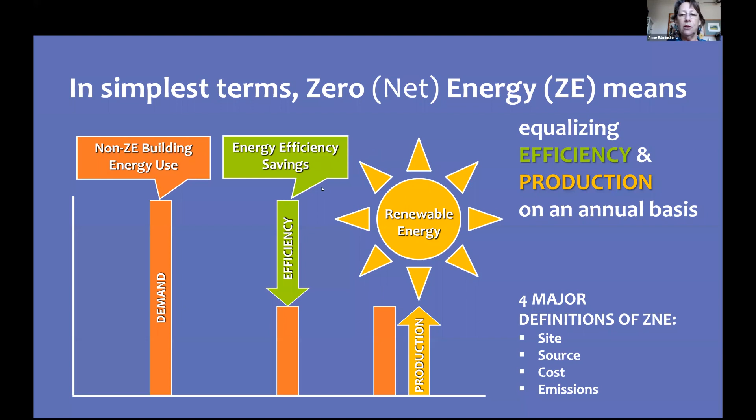Next slide. Okay, so what we're finding initially is there are all types of zero energy homes. And I think in the early days of this movement, there was a general perception that this was really sort of a niche boutique part of the market. That's really not the case. Certainly we do have our luxury examples, but we've also got affordable homes, both single and multifamily, spec developments, and production. So all sectors of the market are represented with zero energy homes.

Next slide. We also find them in pretty much all North American climates, and I've just shown one example in one of our more extreme climates as an illustration. Let's move on.

So all of these homes or projects have certain things in common. They are paying close attention to form and orientation. A lot of emphasis on the enclosure performance, so roof, walls, floor, foundation, windows, doors, and then they're all looking at ways of producing comfort, heating, cooling, and mechanical ventilation in super efficient ways, and then best-in-class electric devices, so lighting, appliances, and electronics. Of course, not all those are supplied by the builder or specified by the designer, but those are the ingredients that go into a zero-energy home.

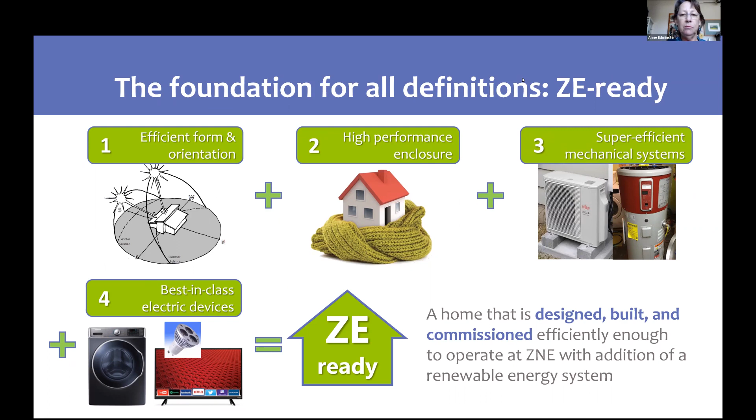So that's pretty much what it takes. Add those ingredients, sort of like, here's your baking, add water, you get zero net energy.

I think one part of the conversation that really is lacking frequently is the fact that a zero energy home is a home with something else. It adds a utility or a piece of utility functionality. So when we talk about a zero energy home, I think we're missing an opportunity to point out that there's quite a bit more to it.

We're, in effect, transferring some of the money that has traditionally gone to a utility into the home itself, paying less to the utility, and the net effect is that we have more control over the energy systems and bills in a zero energy home by virtue of including that partial utility functionality.

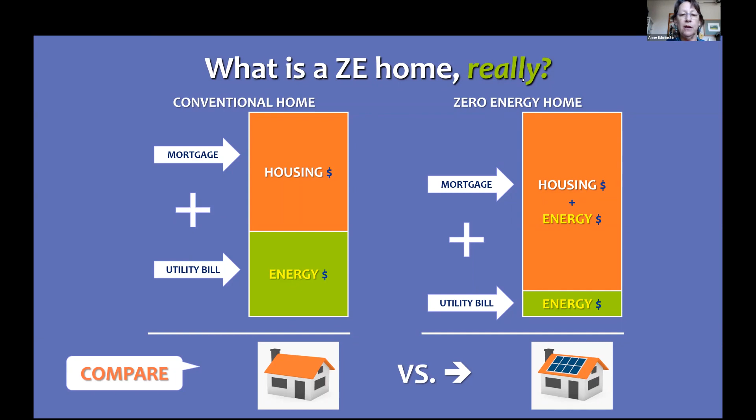We're reducing noise through better quality enclosure, less wait time for hot water because that's another system that gets a bit more attention. And of course, by really controlling the energy performance of the home and requiring less from the utility, it means we are less vulnerable to changes in cost from utility supplied energy over time.

Meanwhile, we result in greater levels of comfort, higher quality indoor air, increased equipment reliability, and of course, energy self-sufficiency.

I like that the title of your May webinar, Tim, really looked more at energy self-sufficiency. So while a zero energy home is connected to the grid, we have more of those capabilities within control. Next slide.

So here's the way I really encourage people to think and talk about a zero energy home. It's something that has a very significant added value as compared to the garden variety home that isn't zero energy. It's not the same product. It's not the same value. It's an increased value. And interestingly enough, may actually carry the same price, however, but need not.

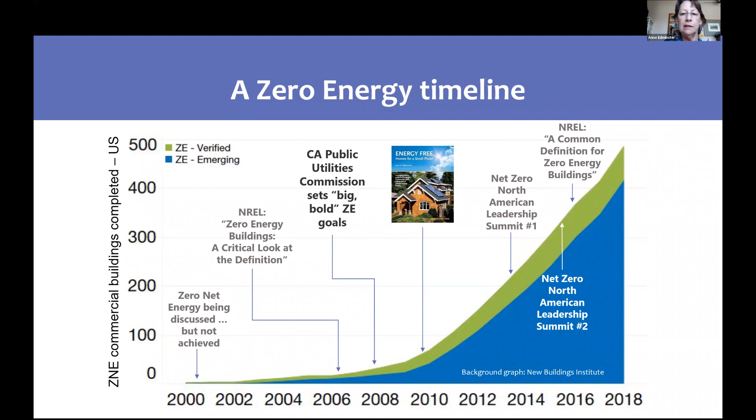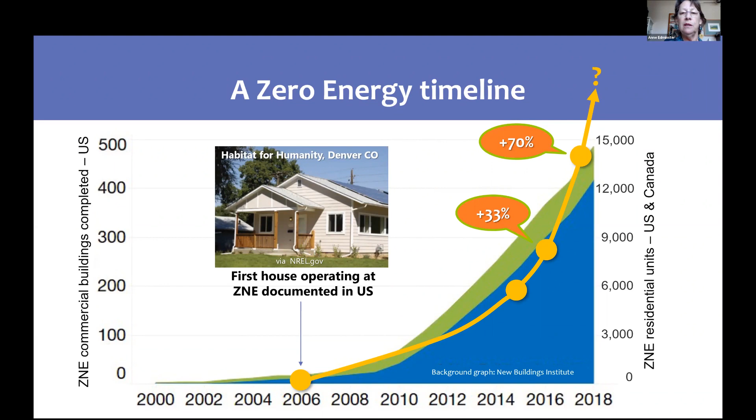Let's move on. Obviously, that's still a really small number of housing units compared with all the homes we have in the US, but it's healthy growth, and we hope to see it go exponential and really transform the industry soon.

Meanwhile, among the things the inventory has revealed are these different waves. The first wave of early adopters was dominated by single-family, luxury, bespoke homes. The second wave, interestingly and somewhat surprisingly to many, is really dominated by affordable and multifamily projects. In both 2016 and 2017 inventories, about 50% or more were multifamily, so this is by no means a boutique movement.

On the next slide, you'll see our third wave, which hasn't completely hit yet but is starting to be felt in the stats: the emergence of spec and production builders into the zero energy movement. Once that wave hits in full force, it's really going to represent a lot of building activity, so we're quite excited to see that, along with continuing growth in the multifamily sector.

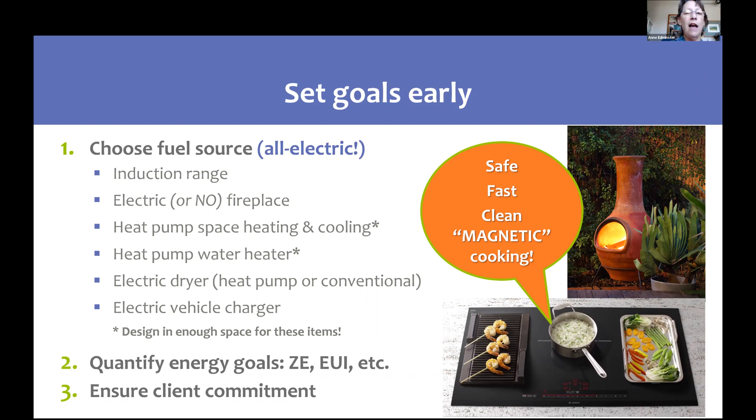And then finally, but by no means least, client commitment is critical to this. Anytime you're targeting performance goals that are outside the norm, the client absolutely has to be behind it. The financial support has to be there to pursue these goals, because while it need not cost extra, it does require a steadfast dedication to pursuing the goals in order to get every member of the team to conform to those.

I've actually done a poll with thousands of people in different groups about which of these attributes they think might be expendable on the project team. The only one that all of these thousands of people are willing to give up on occasionally is experience, and never experience of the team as a whole. However, an inexperienced team member who exhibits all of the other characteristics can still be a fabulous contributor, provided there's a body of experience in the team as a whole.

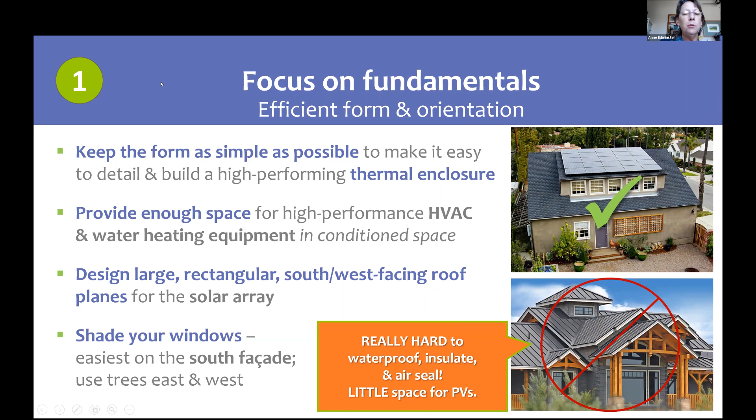So form and orientation, some of the things that maybe aren't thought about in a more routine design that doesn't have these high performance energy goals. The ability to have enough space for all the stuff that's involved, so your roof space for some of the heating, ventilating, air conditioning, and water heating equipment that might normally not go into conditioned space and really should or must go into conditioned space. And there are ancillary benefits of a somewhat simpler enclosure, meaning less time, cost, and risk associated with waterproofing, insulation, air sealing, those forms.

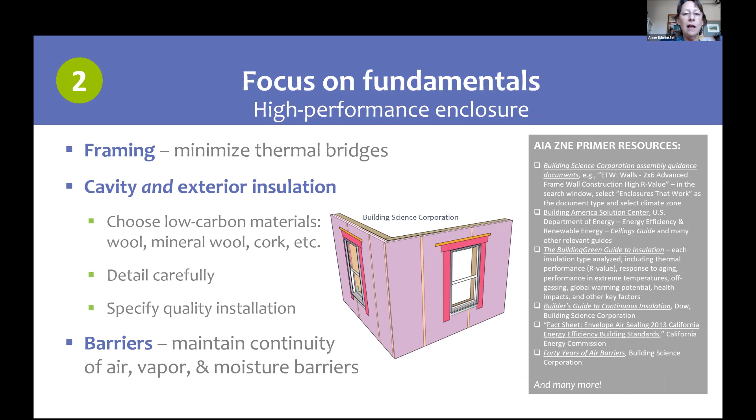That resource, while it is written for California architects, is by no means exclusive to Californians nor to architects. There are a few things that are specific to California's circumstance, but I think it's a very useful guide for many.

So a little bit more about enclosures, air leakage control, which I've already mentioned, but honestly I don't know if it's possible to harp on this issue enough. You all are in a much colder climate than I am, colder and warmer as a matter of fact, and more humid, so a lot more what many folks would call real weather than we have in coastal California. So it may not be quite as necessary to emphasize this, but we find, all the teams I work on, that getting this aspect of the enclosure done in a satisfactory way is the thing that causes the most aggravation, brain damage, and arguably unnecessary expense if it were approached in a more comprehensive way.

And that comprehensive way would be providing the details in air sealing. It's embedded in the American Institute of Architects Zero Energy Primer that I referred to here. There's a link to that primer at the end of this slide deck.

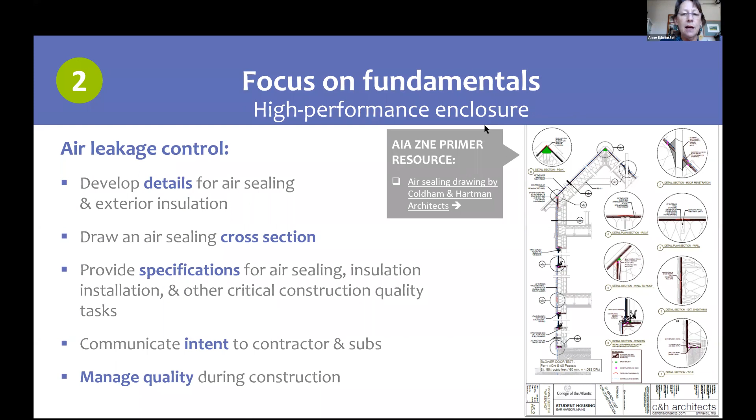Okay, so a little bit more about enclosure. Enclosure, honestly, the enclosure is the bedrock of a high performance home, so it deserves all the attention you can give it.

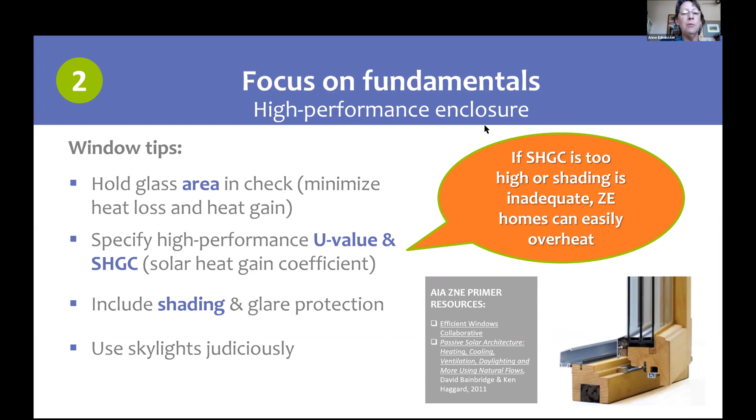Again, some maybe not entirely obvious issues about windows. Views are a big issue for custom homes, and those views, in my opinion, often lead to a little too much glass area. One of my favorite quips to project teams is, I don't think your knees really enjoy the view—do we have to have glass down to floor level? So everything we can do to be reasonable and judicious in providing glass area that's appropriate for the functionality, doesn't compromise performance. And then, of course, the more obvious aspects of the specification map.

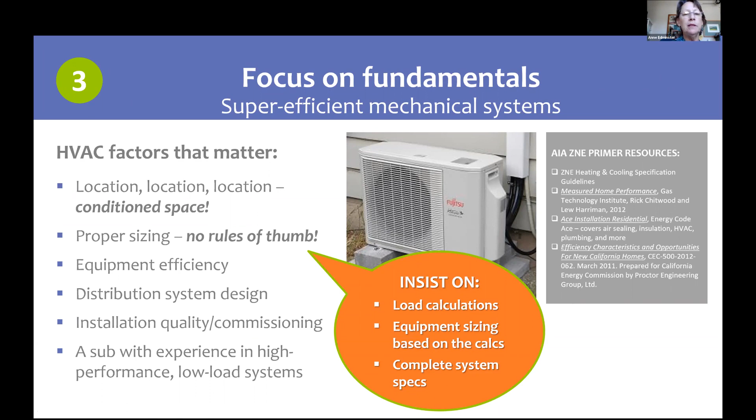Now, moving on to the third aspect of the fundamentals, efficient mechanical system. I want to point out that equipment efficiency is really the only factor in HVAC performance that normally gets any attention. While it is certainly important, all of these other factors can be equally, if not more, influential in the overall performance of an HVAC system design.

So let's go ahead and roll forward, since all this will be available to you to read the gory details. Similarly, there are some factors in mechanical systems, conditioned space, the equipment, and as designers, locating water heaters and taps as close together as possible, a mental shift, as opposed to scattering them all over a plan.

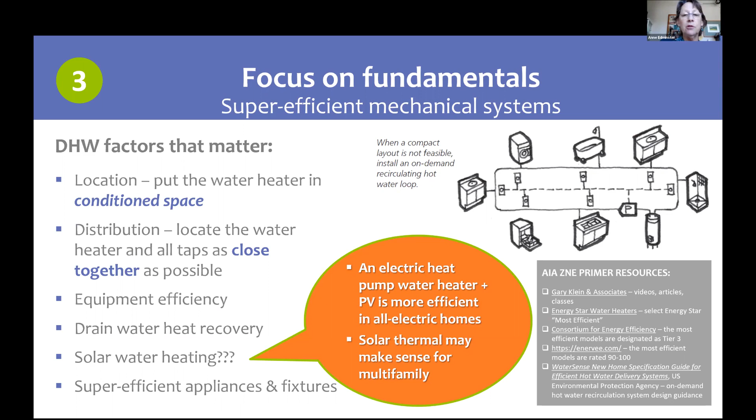Again, equipment efficiency is important, but not necessarily the be-all end-all, because we have many other factors that go into the overall equation. Let's go forward.

So factor number 4, best in class electric devices. If we were doing this live, we would have another quiz to find out what people think best in class means. The usual answer, by the way, is Energy Star. And yet Energy Star, in fact, has become almost a de facto for performance rather than representing top tier, so much so that the EPA has introduced its own top tier, referred to as Energy Star Most Efficient.

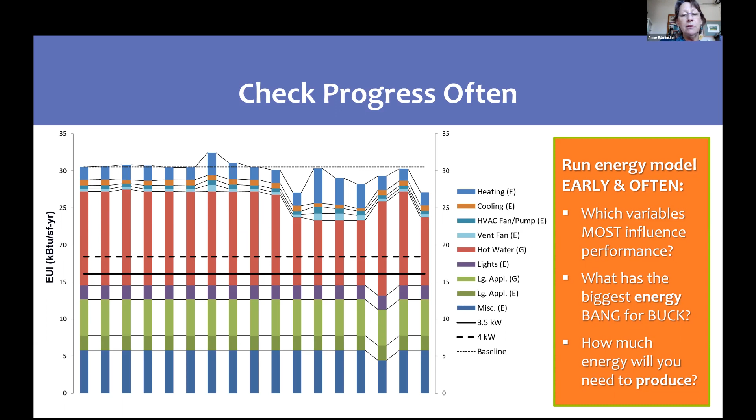So this graph here illustrates one project that I worked on where we wanted to really understand the influence of the different variables. Initially we vary them one at a time to see—we've got some significant and less significant influences here. Once we understand where the big influences are, we can focus our efforts more on fine-tuning performance and putting together packages of features and performance specifications, and then also looking at how much we're paying for those features.

Another aspect of checking progress is balancing energy production capacity with energy consumption. So the energy model will give you information about the energy consumption, estimated, of course—we haven't introduced the human element yet—and then getting information on potential solar production. There are a variety of resources to help with that. Online, we have on the National Renewable Energy Laboratory's website, nrel.gov, the PV Watts calculator, and then, of course, the more reliable and more site-specific would be something from a solar vendor for your area.

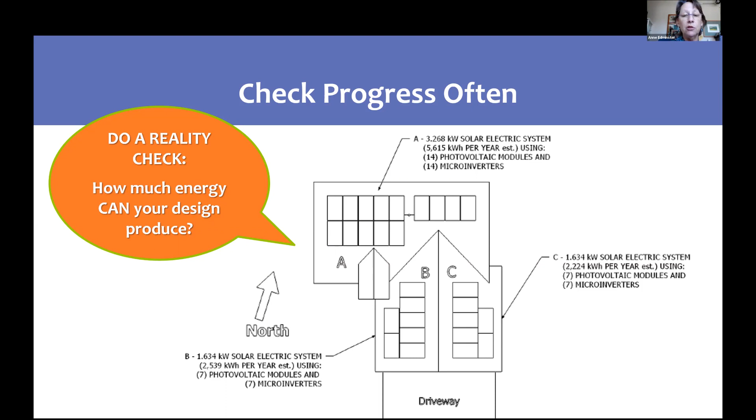So looking at whether you're going to achieve that balance or not.

The last critical piece is really making all these important design and construction decisions stick. I can't tell you how many times I've seen projects stumble during construction because there was a failure on the part of the design team to include all the critical decisions into the construction documents, the contract documents. They're called contract documents because it's the contracts that bind everyone to the decisions that were made. So all of these things have to make their way into the CDs.

Let's move on. In CDs, we don't want to neglect the other aspects of human and planetary health when we're putting all that effort in. So I also want to encourage everyone to look for the other performance aspects of our materials and products that matter.

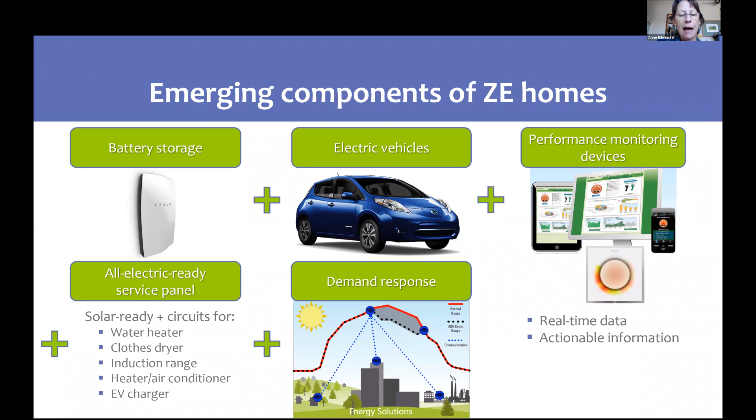I mentioned earlier there's a pretty strong drive, very political will, to impose all-electric construction from the outset. And finally, we're also seeing a need for more demand response operability in zero energy homes, recognizing that zeroing out energy on an annual basis doesn't necessarily address the day-in, day-out, hour-by-hour energy needs at grid scale.

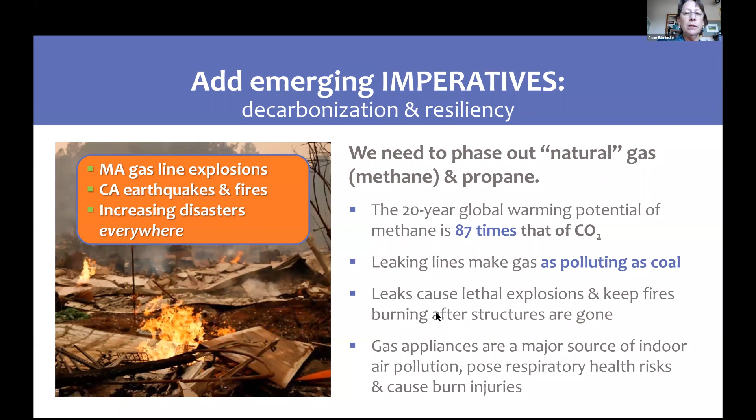And then of course we have the hazards caused by earthquakes and subsequent explosions, as well as fires from other sources, which are a very big concern for us in the West. And then finally, gas appliances are really not healthy for us to have in our homes. The byproducts include formaldehyde, and they're implicated in high rates of asthma and many other things. So there are lots of good reasons to get rid of natural gas in our residential construction.

Next slide. So where this all is boiling down to, as I mentioned, is more and more emphasis on energy storage, demand response, grid controls, and a real shift in the narrative from zero energy to zero carbon, or zero greenhouse gas emissions.

In the short term, we wrap our arms around greenhouse gas. And then finally, there's recognition that we need to work on these issues at community scale as well as individual building scale. Zero net energy achieved annually on an individual building does not resolve all of these issues, so we need to be tackling them at community scale. And there's a lot of movement in that direction all over North America and the planet.

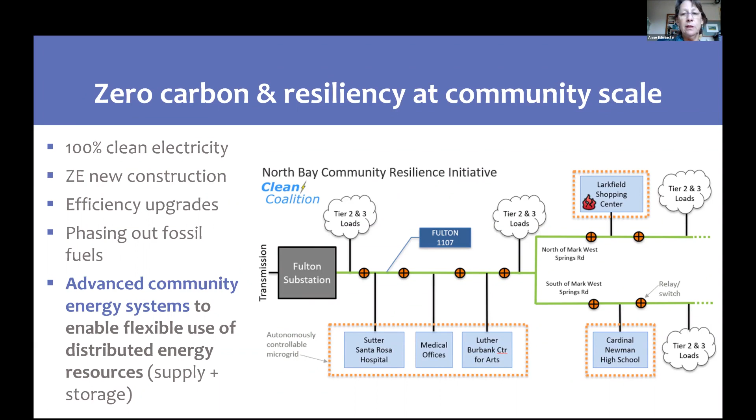Okay, so another example of how this is playing out is the many conversations about community microgrids and advanced community energy systems, where within a given limited geographic locale, we are looking for demonstration projects that include local clean energy generation, local energy storage, the ability to upgrade existing buildings to higher levels of efficiency, all new construction being zero energy, zero carbon, zero fossil fuels, and the ability to control these loads and island in the event of an emergency. So all the microgrids would be connected at a larger scale, but have the ability to be controlled unto themselves in the case of an outage or another emergency, providing critical services in those events.

Next slide, please. Got another, okay, there we go.

And then I think this is my wrap-up point: we also need to be concerned with the embodied carbon in our construction projects. For many years, even decades since I've been involved in this work, embodied carbon was sort of viewed as important, but not as important as operating carbon. Let's go to the next slide, Tim.

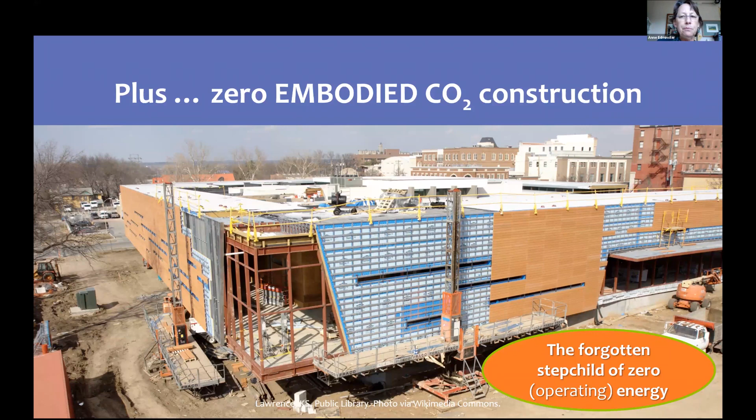So when we look at this lifespan, this represents the first, say, 5 to 10 years or so in getting a building up and running. And all of that is just an initial investment, and that's much, much greater. And that's all going to happen in this critical next 12 years that the Intergovernmental Panel on Climate Change tells us we have to act. Whereas the operating energy, that's all downstream. So we really have to be much more focused than we have been on embodied carbon.

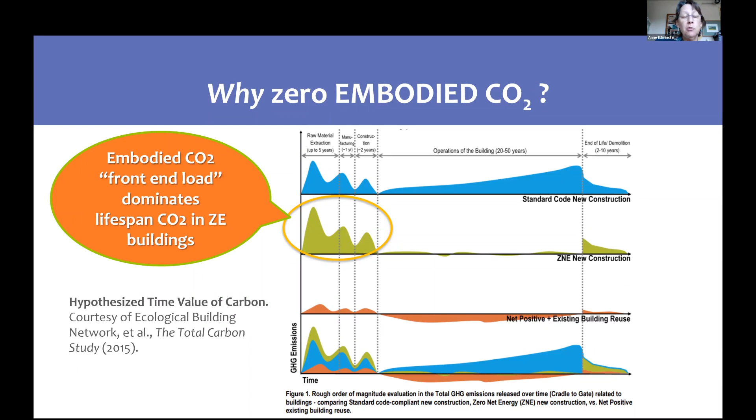So performing life cycle analyses that look at embodied carbon is going to be, I think, a tool that's very important to the design community going forward, as well as energy modeling. So we need to be looking at both.

Thank you, Ann, and thanks for this wonderful encyclopedic overview of net zero. Really great. We have a question from Andre, and to the other participants, please do chat your questions into the chat box. Ann, do you see an increasing number of well-established builders transitioning to zero energy building? And I guess that is a geographically specific phenomenon. I have a follow-on about that as well. But what is the overall trend that you see for mainstream builders?

I think, as I mentioned, we're really seeing the tip of that iceberg right now, and I think it's going to shift dramatically. Right now, a couple of the larger builders are getting more than their toes wet. Meritage is a very large national builder. Thrive is a very prominent home builder in the Denver area. And there are quite a few other examples around the country of production builders getting into this space.